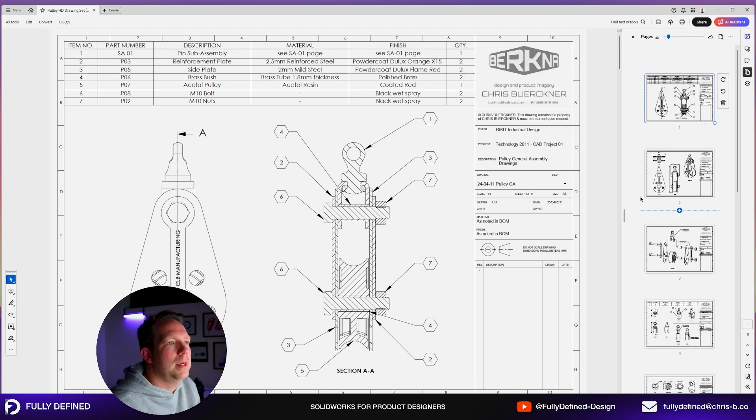What we're going to create is this drawing set. Now, this is the last version of the drawing set that I created for my students. This one was done back in 2011, so it's had a decent life. Berkna in the top right-hand corner, that's my old freelancing logo. That is my name and my Hotmail address. But the drawings here, we're going to just create a replica of these. It's 11 pages of content, and if we press the pages icon here in PDF, we can flick through them all and you can see quickly what those are.

The general layout that we'll be working to is having a general assembly on the front page with a bill of materials on the top and some general views. We will have standard 3 views and an isometric view on page 2 of the assembly showing overall dimensions. We will have an exploded view showing how our parts come together with a couple of annotations and route lines.

We will have a drawing for the sub-assembly, again showing some of its dimensions. We will look at configurations to do the before and after of the pivot pin, and again, do a second bill of materials for that sub-assembly. And then we go into detail for each of these parts.

Now, these part drawings, we're focusing on a couple of drawing views, dimensions, view labels, in some cases some annotations, and sectional detail views. We are not focusing on the materials, the production methods. That's another level of technical drawing and design knowledge that we're not getting into in this project. This project is for beginners doing drawings for the first time. So I'm going to introduce you to all the tools that you need to replicate what you can see here on screen.

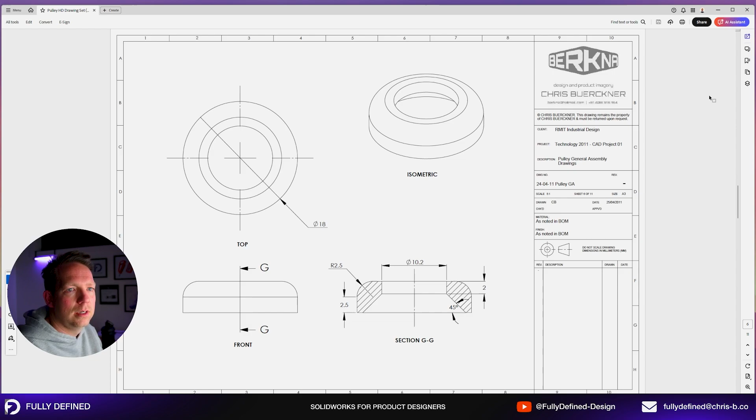Now, some of those parts, as we know through the modeling, are quite simple, so they're obviously going to be simpler to create on a 2D drawing. And then others have intricate details like the engraved text on this. That's going to require a detail view. Again, we'll show you how to do those.

Sheet metal part. Can't remember if we've already converted our form bracket into sheet metal or not, but we will go through that process. And the pulley wheel will show you how to do a section view, detail view, and a couple of annotations. And that's going to be our complete drawing set. So let's get straight into it.

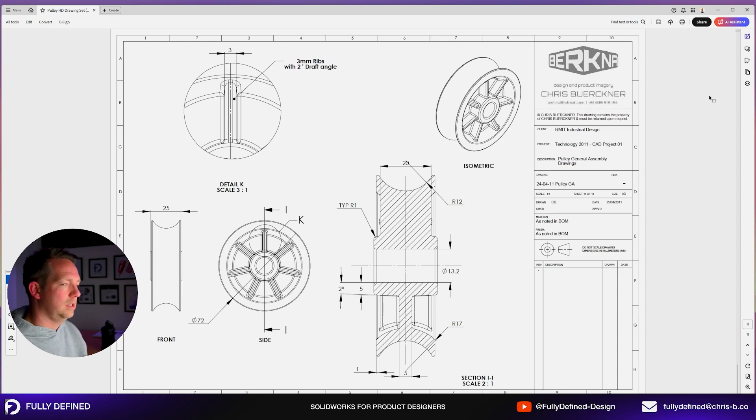This file is also available in the Google Drive for reference. So you can come to that, download your own copy at any point. You will be welcome to lay out your drawings following this guide here. I'll talk more about that as we go.

Now, to start a drawing file, it is helpful to have the parts or assemblies open that you want to create a drawing of. Saying that, you don't need to open up all the individual parts. Just start with your assembly open, because that's going to be the first drawing that we might do anyway. You can go File, New, or you can go Make Drawing from Assembly. Let's press that button and see what happens.

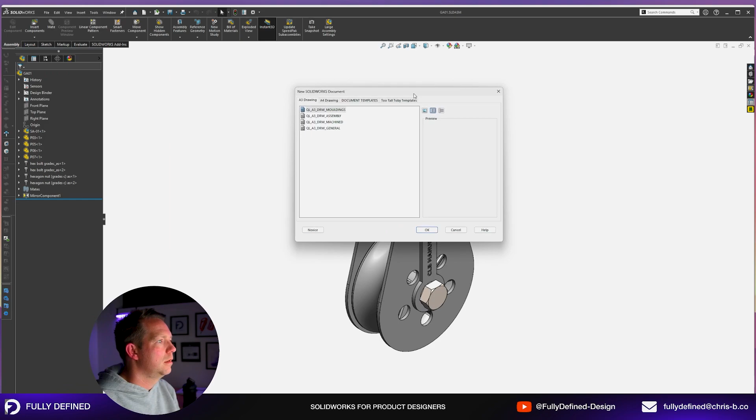All right, so that will take us to our new SolidWorks document screen. Now, if I flick over to the novice screen here, you can see that parts and assemblies are grayed out. It's only going to allow me to select a drawing file. So I can select drawing and OK. And then our very next screen is going to open this sheet format size pop-up window. Now, this may not happen depending on your SolidWorks defaults.

So here I'm going to explain a little bit about SolidWorks file types, SolidWorks document templates, and sheet formats. We already know there are two types of SolidWorks files. We have a part file and we have an assembly file. The third type of SolidWorks file is a drawing file. A drawing file, as you can see from the description, is a 2D engineering drawing, typically of a part or assembly.

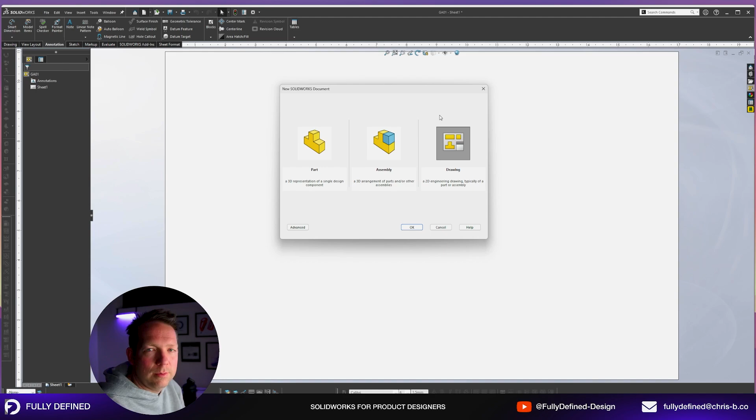You can do drawings and sketch something completely new in the drawing, but it's only ever going to stay in 2D. And that's a pretty rare case. It's very rare that you'll do that. 99% of the time, you'll be referencing the parts or assemblies that you've already created. Now, those being the three file types, when you have a drawing file type, as you can see here on screen, our tools are very different. We have different drawing views, we have view layout tools, we have annotation tools, we have sketch tools.

Sketch tools are just like in a part file. There are some differences in how they function, but they're there. We also have markup, evaluate, and some other add-ins. Now, I'm going to turn off a couple of those ones because we don't need them. Don't need add-ins. I do not need evaluate. I do not need markup. I'm going to turn them off.

And sheet format, we have some buttons here to edit sheet format, edit the title block, or create an automatic border. Now, what is a sheet format? Let me explain with my drawings here. If we look at this page and we want to understand what elements are custom for the page, if we look at our drawing views here and here, everything there, that's driven from those assembly files.

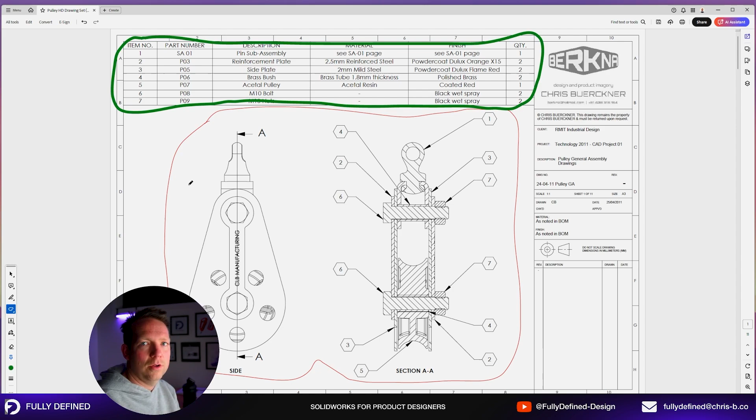Let's draw some bigger lines. We have a bill of materials up the top. The bill of materials is a table that gets inserted into our drawing, and that table is referencing the model that is on that page. In this case, it's referencing the assembly file. We have a similar thing on this page here, where this bill of materials is referencing this sub-assembly that's on the page.

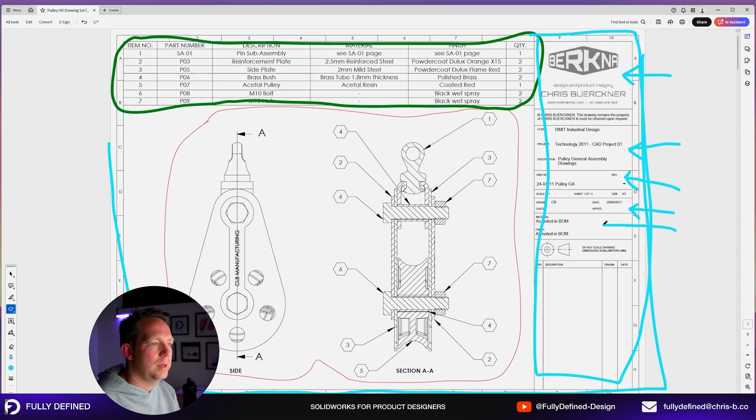And then the other element that we have in our drawing, which we can see, is the border that goes all around the page, and then our side over here where we've got some company information, some information about the client and the project, drawing number, revision, scale, sheet size, etc., some information about materials, third angle projection symbol, and then a revision table. All of this, everything that's in the light blue color, that is your sheet format.

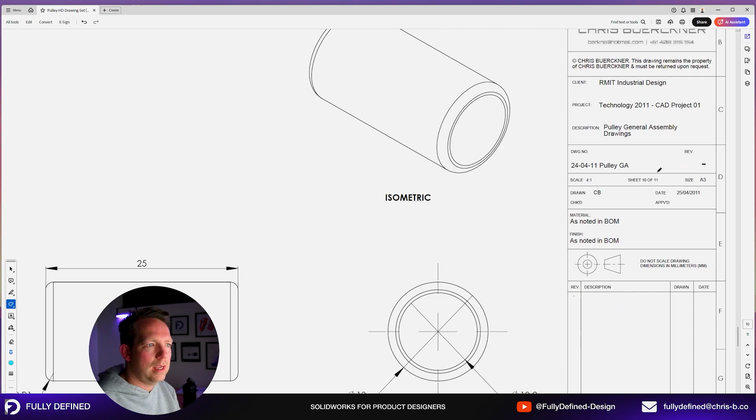And if we go through these pages, you can see that sheet format is consistent throughout that entire file. There's a couple of elements that do change from sheet to sheet. In this case, our sheet number and our scale. So if I flick through the pages, you can see it just below here, so scale and sheet.

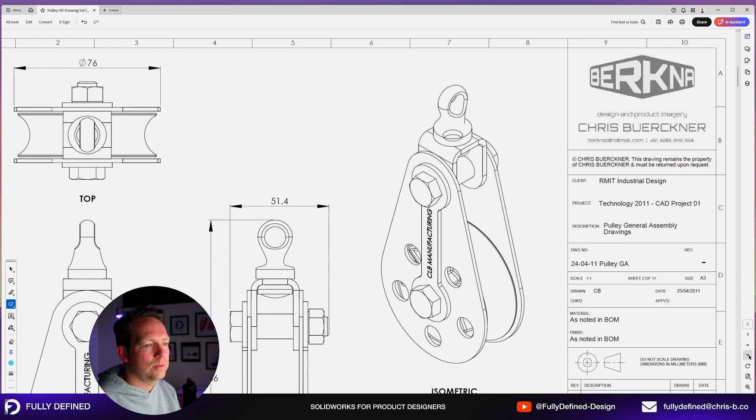So the sheet is like page, so it's page 8 of 11. And the scale changes depending on the images, the drawings, or the files that are on that page. So for my assemblies, they're 1:1 scale. But when I look at some of these smaller parts like the washer, if I were to do this part 1:1 scale, it would be tiny on my page. It would look really out of place.

Now, typically what you might do is instead of using an A3 drawing size, you might use an A4 drawing for that part if it's so small, and have it at 1:1 scale or 2:1 or something like that. But let's remember that our objective with these drawings is to communicate. Okay, so when we're saying communicate, we want to be really clear about the information that we're providing to whoever it is, work out who our audience is, work out what they need to see.

If it is a manufacturer, they're producing this part, well, they want to know to what dimensions and to what shapes and forms they need to make that part, right? Without going into detail about manufacturing processes, that's what they want to see. So the light blue being the sheet format, if we go back into our SolidWorks file here, we can see there's actually nothing on this page. And this is what could be referred to as a blank or empty sheet format.

There's nothing here. So if I close that file and start a new drawing again, it's at this screen here where you can select a sheet format. If you don't select a sheet format by clicking in standard sheet size and then browsing to one or selecting one already, and you select custom sheet size, that is how you can actually create a blank page in a SolidWorks drawing. So if you just want to create a blank page that, let's say, is an A4 size, so 297 width by 210 height, this is in millimeters, you press OK. We now have a blank A4 page.

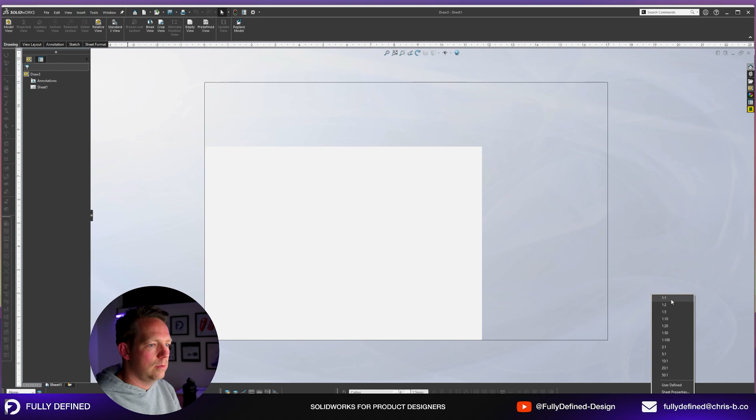And if my scale is 1:1 and I do, let's say, a sketch of a rectangle and I put in my dimensions, sorry, this is in IPS, let me change to millimeters. You'll see here, 210 by 297. Okay, that is an A4 sized drawing. So that's a handy tip if you ever need to create a blank page.

Now, when might you want a blank page? Let's say you're doing some concept work and you actually don't want a sheet format on your pages. You just want to print out something that you've been modeling quickly. Okay, maybe you want to create a 1:1 model or have a sketch there in front of you. Have a dimension drawing there in front of you so you can do some sketches over the top. You don't want the sheet format stuff around it. This is what you want to do, a blank page. So now you know how to do that.

But for our project here, we actually want to have that detail on the page. So all this information here, we want it in our file, in our drawing file, so that it carries across to each page so that we know and our supplier knows the information that we're communicating to them. In this case, we're going to communicate to them the name of the project, who our client is, the description of the drawings they've received, the drawing number, and other things such as the date and revision.

Okay, this is important. If you don't know what a revision is, well, a revision is the version of the part that you're sending them. So if you've sent one part previously, you've made some changes after some feedback or prototypes, you want to send them version 2. Okay, you want to make that clear on the drawings so that that supplier doesn't get confused with an old and a new revision.

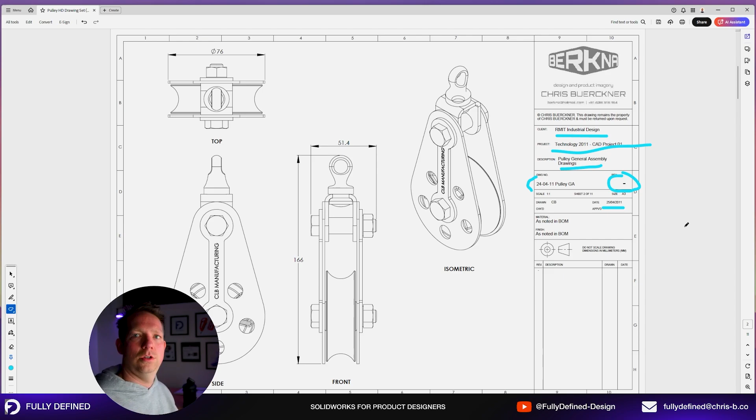So, sheet formats, let's go into how they work and how we can create our own. We won't create our own in this project, I'm going to give you one, but let's see how they work with our files. So, to get into the sheet format mode, let's open a different file that has a sheet format. Now, I have created one already. I'm actually going to import it into this drawing by clicking on standard sheet size, browse, and then I'm going to browse to the one that I've created. All right, so this is our sheet format. Looks a bit different to the one that you saw earlier, but it's going to work in a very similar way.

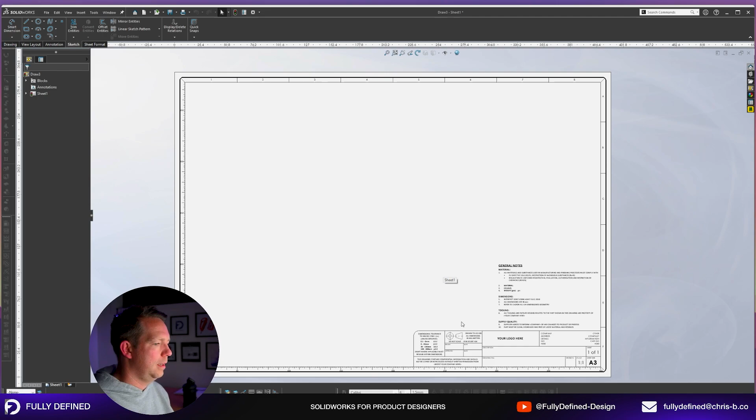You'll notice that these lines on the page cannot be selected. That is because it is part of the sheet format. If I want to edit the sheet format, I have to click on the sheet format tab and click edit sheet format, or right click on the screen and go edit sheet format.

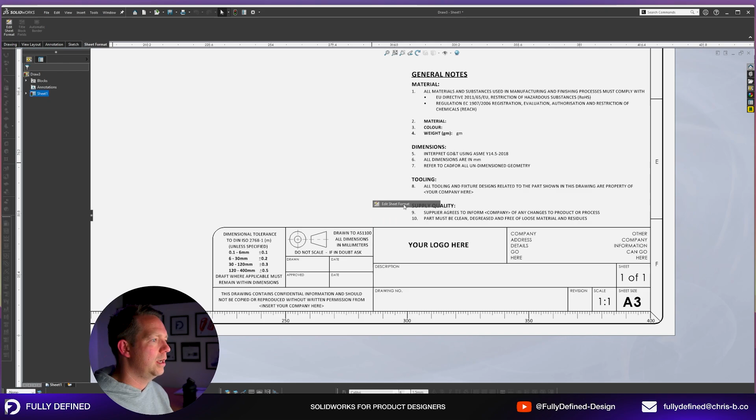Now I'll be able to edit these lines. So I could select this line, for instance. I can see it's just a standard sketch line. It's on a layer, which is thick, so it's thickened up that line. You can look at layers and layer properties another time.

But these are all these little elements here, just different sketch elements on the page. And then here, these are annotations or notes. In this example, this note is just the number 2, but that is something we could change if we wanted to.

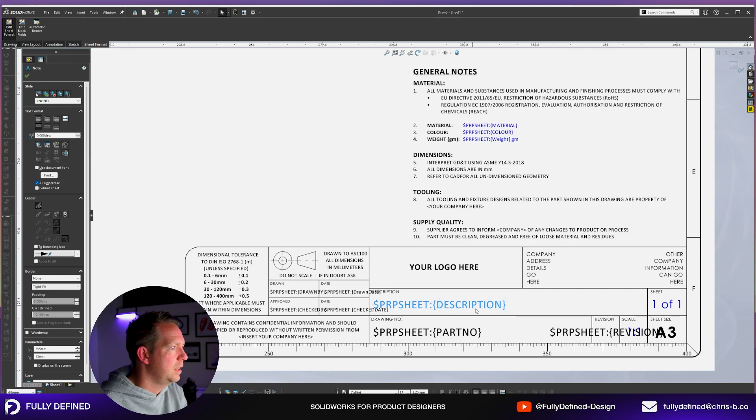Down here is our main information, and you can see there's a couple of items which are actually changed to color. Just to make it really clear, I'm going to change the color of some of the others so that we can also identify them.

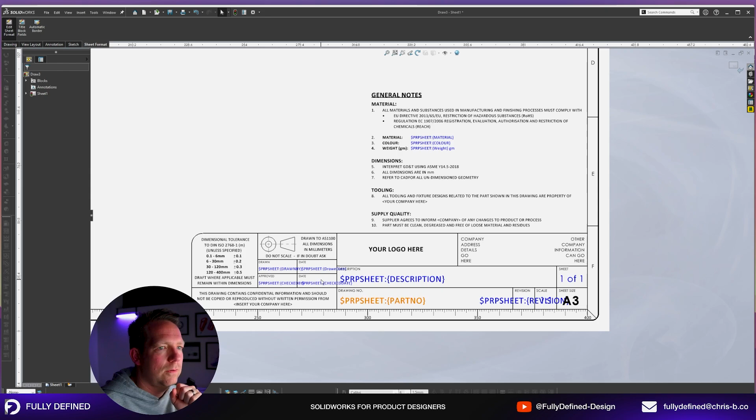Now I believe I've got everything here in blue, which needs to be. So all the blue elements, you can see they've essentially got a formula.

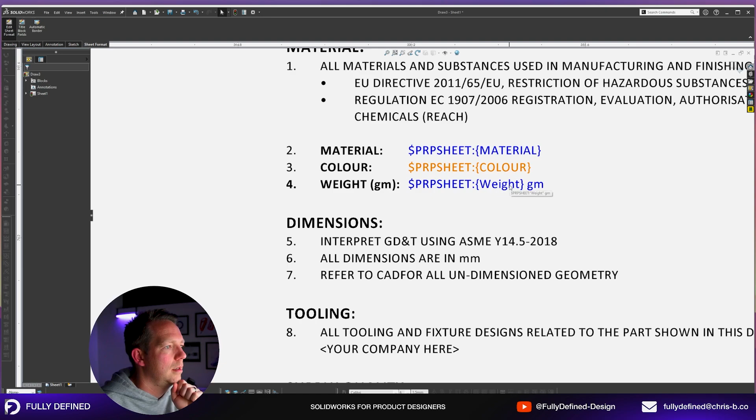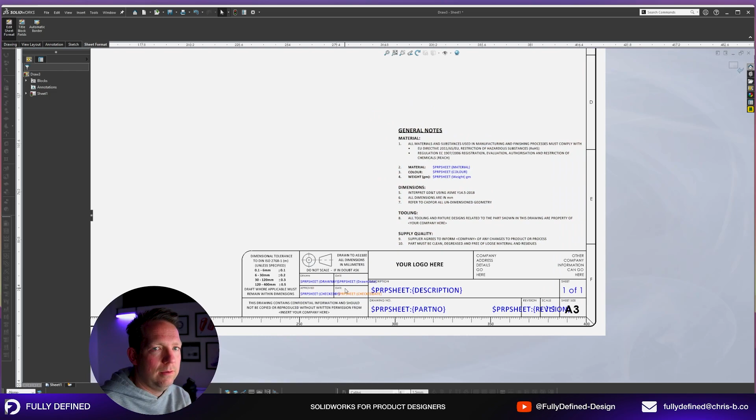So if we go here, $PRP sheet material, color, weight - what those elements are looking for is a value to come from a part or assembly file that is put into this drawing. When we're editing the sheet format, we can actually change those equations, those formulas, to reference something else. That is something I will show you in one of the later lessons of this project, or more advanced, I might show it in a more advanced class for drawing setup.

But the main thing I just want to get across is that everything that is black is static. It won't change, it won't move. So when we create multiple copies of this page in this drawing file, we will end up with all of that black information being exactly the same.

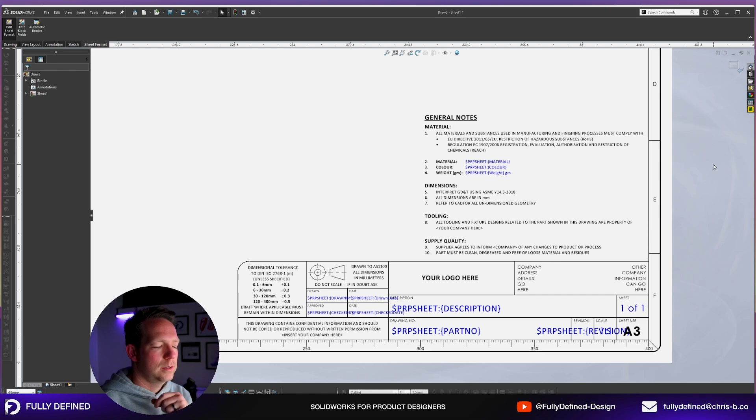It's only the blue elements that will change. And those blue elements will only change if, for instance, we have a different part on a different page. Well, that part number is going to change. Okay, so that is our sheet format mode.

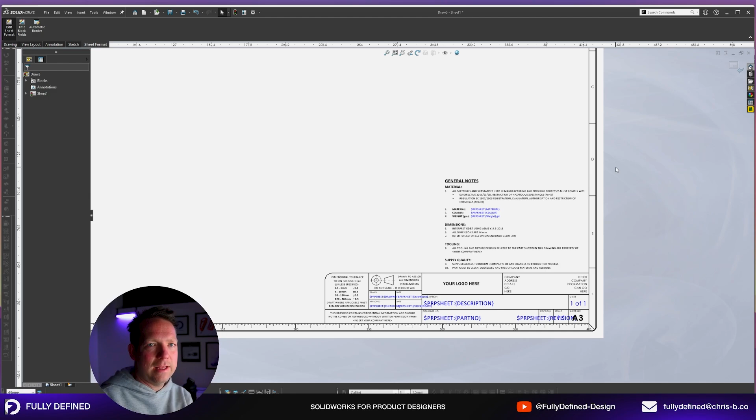Now to exit out of that sheet format mode, we're going to click this button here or here. We're going to right click and go edit sheet. And then we're back into our normal view mode, being where we're going to add our drawings of our parts.

So while we're at it, talking about sheet formats, I also want to talk to you about document templates. This can get confusing as a beginner because templates and formats sound like kind of the same thing.

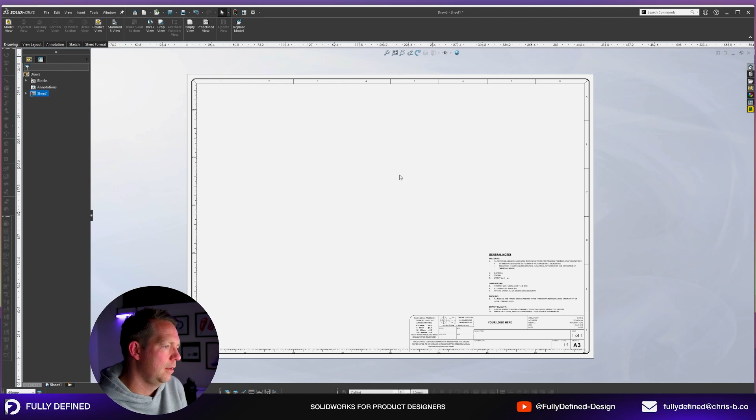Well, not quite. I want to explain by opening up this screen here where we have a new SolidWorks document. So when you select this part here, it's going to open up a new part file, and that new part file comes from a part document template or a part template file.

So with any SolidWorks installation comes default templates. And if you are using SolidWorks for the first time, no one else has used it on your computer, SolidWorks will just use the default templates.

If you're working for a company that has an established engineering team, design team, other designers, they may have already created these templates and stored them on a server or on the cloud, or on the laptop or computer you're working on.

And those templates save such information such as custom properties. Sometimes it'll save information like the author and company details. And often it's a way for a company to keep track of their files that they create internally.

Now there are part templates, there are assembly templates, and there are drawing file templates. The template is different to a sheet format. The way it is different is that when you open a template file, so drawing template, it will include a sheet format already assigned to it. You can have multiple sheet formats with multiple document templates.

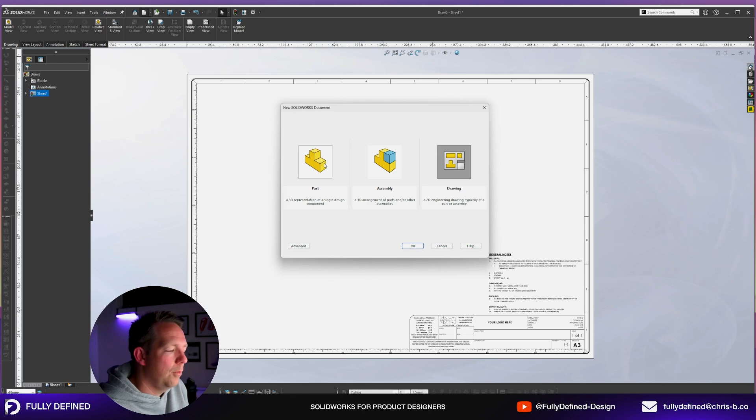And where that comes into play is when you click on this Advanced tab on the new document screen, you can see here there are folders. These are tabs, but these tabs actually correlate to folders that I have in Windows Explorer. And within those folders, my folder of A3 drawings, I have 4 different drawing templates.

So let me just zoom into that to make it a bit clearer for you. I have an A3 drawing folder, A4 drawing folder, and a document templates folder, TooTallToby templates. See TooTallToby stuff on my page or his website for more SolidWorks and 3D modeling tutorials.

Within A3 drawings, I have A3 drawings for moldings, for assembly files, for machined parts, and for general assembly parts or general parts. So I have 4 different templates, and each has a slightly different sheet format. Same in the A4 drawings. Included here as well is a blank template.

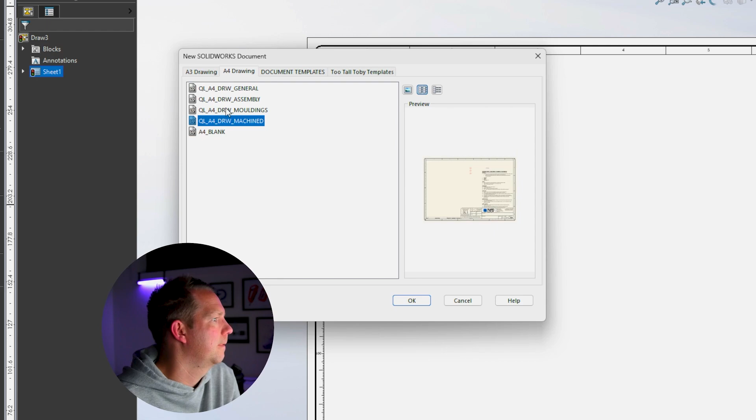Okay, now one of these might be off. I might have to go in and edit that one, fix that up later. Document template files.

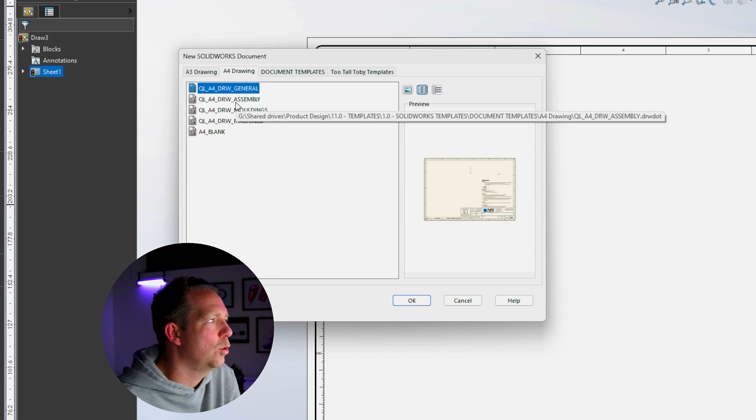I have a parts template and an assembly template. This is from my workplace, so Quad Lock. Anyone starting a new part file is going to use the same part template. Same thing for assemblies. But drawings, well, that'll depend on what you've created and what its purpose is.

Okay, so if I look at an A4 drawing here, a general template, and press OK, that's going to open up with this sheet format that you can see on the screen here. And if I right click, go edit sheet format, you can see how this looks.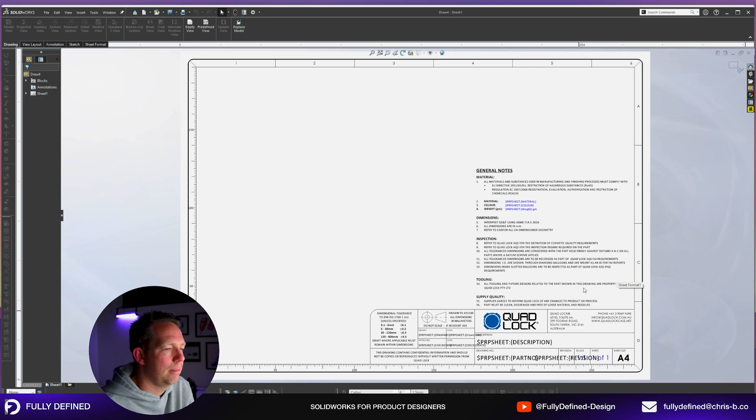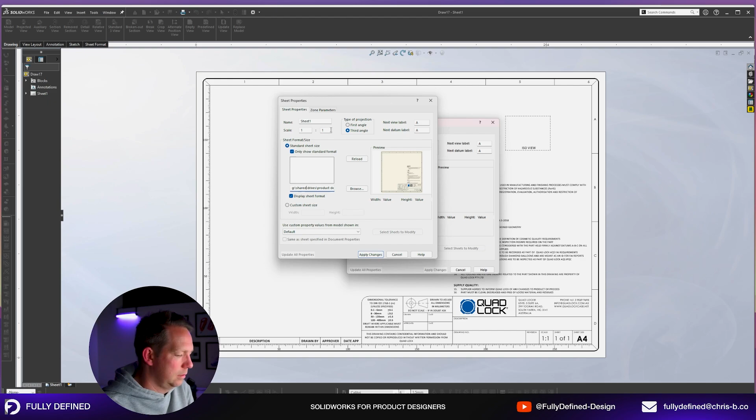Okay, so what happens with the sheet formats? If I start a new drawing and I'm starting a general drawing, A4 file, that is a drawing template file that I've opened up. Within that template file is this sheet format. The sheet format can be found by going right click properties, and the sheet format being used is this file here. So this is the address of that sheet format.

And what's so great about that sheet format is when I want to create multiple pages or multiple sheets in this one drawing file, I can press add sheet, and it's going to create a new sheet with exactly the same sheet format. So that'll carry on across all pages that I add into this file. I don't need to manually add that sheet format to every single page. Just do it once and it's there.

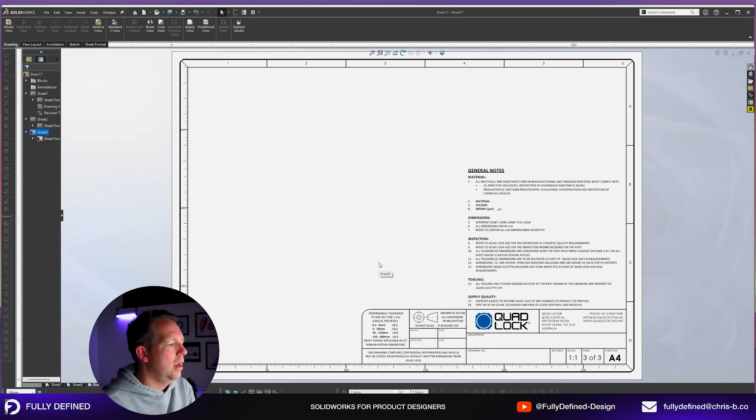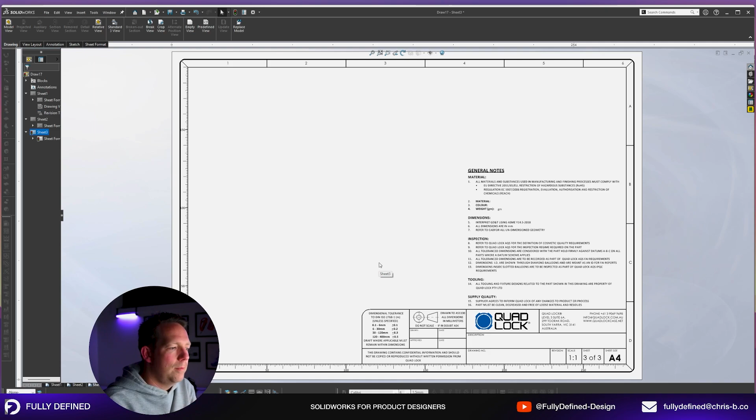So one of the important things with your sheet formats is that you want them set up before you create your drawing set. Okay, if I create a drawing document and I've got, let's say, 10 or 11 pages like we're doing with this Pulley file, if halfway through the project I decide I want to make some updates to my drawing template, to my sheet format, I have to go edit the sheet format, save the sheet format, and then go individually to each of these pages and press the reload button. And that's not something you want to do.

So I definitely recommend always creating your sheet format, editing it, saving it, setting it up as a document template first before going ahead and creating your drawing files.

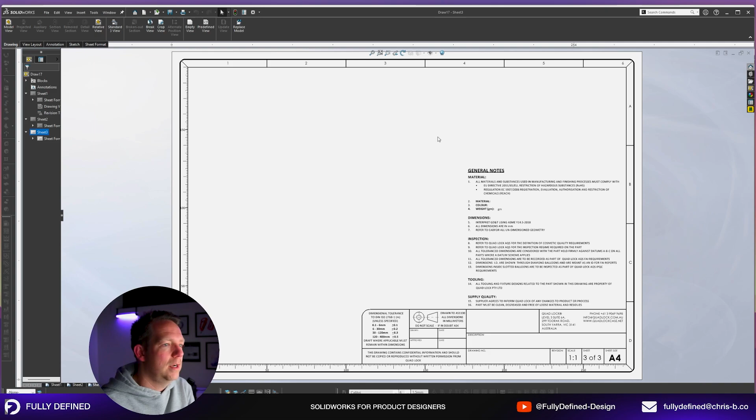So it's at this point that it would be good for you to go into the link below to the Google Drive and download the sheet format file that I've created here. Because I'm not expecting you to create your own for this project, but I want to show you how to import it, download, import, set it up in your own file to then be able to use it across your drawing set. So what you need to do is click on the link.

We'll just use an incognito window here. We're going to copy the address that I've given you, and it is this Pulley A3 drawing general.slddrt file. That is a sheet format file. You want to download that. I'm going to save that in my downloads.

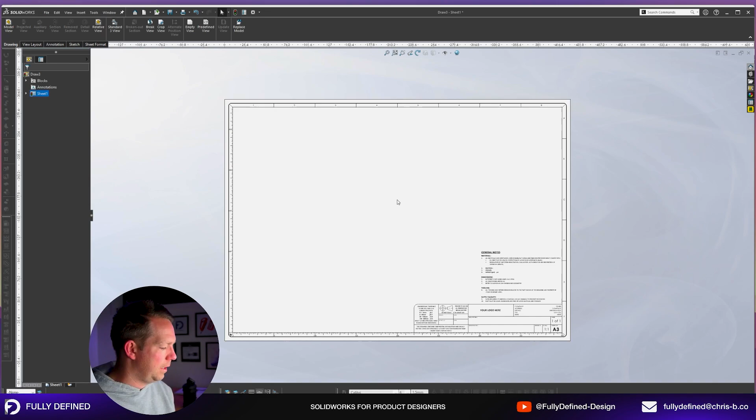Okay, and then to open it up, let's just close this file, and we're going to start a new drawing. Now you can select, even if you're a novice here, you can select drawing and press OK. And when you get to this point here, we're going to click standard sheet size, browse, and then you can browse that file that you downloaded.

Now, ideally, you will have put that file, let's say, in your folder with everything else. In fact, why don't we do that right now? I'm going to cut and paste that into my project folder for my Pulley, so it's going in here. Once it's there, I'm going to select it, press open, and press OK. And you can see now it is in our drawing file.

Now, just in case you did want to make changes before you go through the drawing set, we're not going to look at any detailed changes, but something like your logo.

Right, you can edit the sheet format. We know how to do that now. Right click, edit sheet format. You can type in your details.

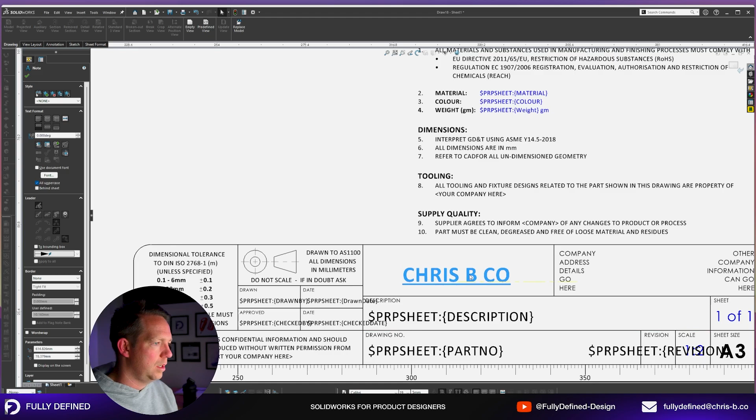Just double click and type, or let's get this into millimeters. Let's say I want that to be 5 millimeters, and I'm just going to put it here. It's already bold, let's get it underlined as well. Okay, so let's just say that's my logo.

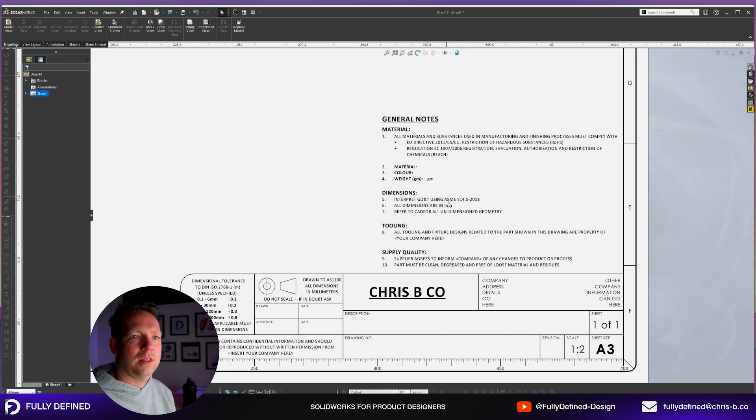Perhaps you want to change your company information, you could do that as well. Perhaps you want to change any of the notes here or scrap them entirely. You can go to edit sheet format, select this whole thing, and press delete.

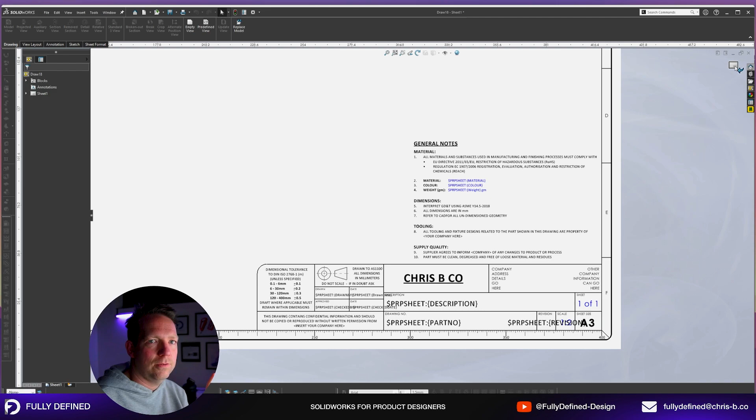You could do that if you want to get rid of them. But to save those, there are two things you need to do. First, you need to exit the edit sheet format, so we get out of that. Second, we go File, Save Sheet Format, and then you need to give it a name. So here I'm going to name it edited so we know there's a difference.

Now the edited one has the bigger logo, so just watch that carefully. If I click add new sheet, it's going to add a sheet with the old sheet format.

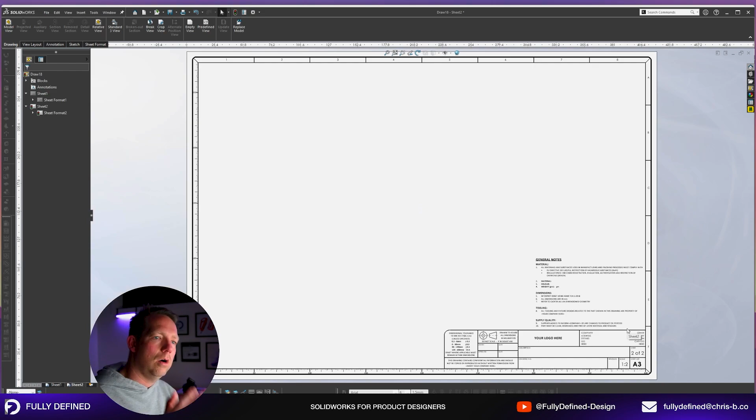If you want to keep that sheet format from page 1 consistent across the rest of your pages, you need to right click on sheet, go to properties, click here for browse, and we need to browse to that new file you just saved. So going to go into here, and it was the edited one. I'm going to press open and press apply changes.

Now we won't notice any difference on this page, but something has been deleted there. What we will see is on any subsequent sheets, that logo carries across now. So sheet 1, 2, 3, they are all the same, except for some reason that little icon wasn't showing up. It's there now, okay? All right, so that is how you can edit and save a sheet format.

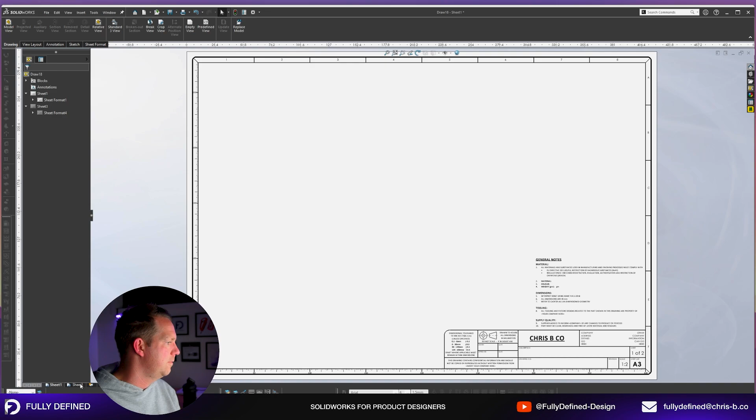Now, one of the really fancy things, I'm going to go back to the original drawing. Okay, browse, content, Pulley. All right, let's stick with this drawing file now and let's save it with the rest of our Pulley files. Pulley drawing set.

Now, the name of the file, I'd like to say it's important for this project. Not important, but when you're doing work with a client, the name of the file usually ends up in the description, or the title of the file, depending on how your links are set up. You will see it at the top of the screen here where it says drawing 19. That is where the name will stand.

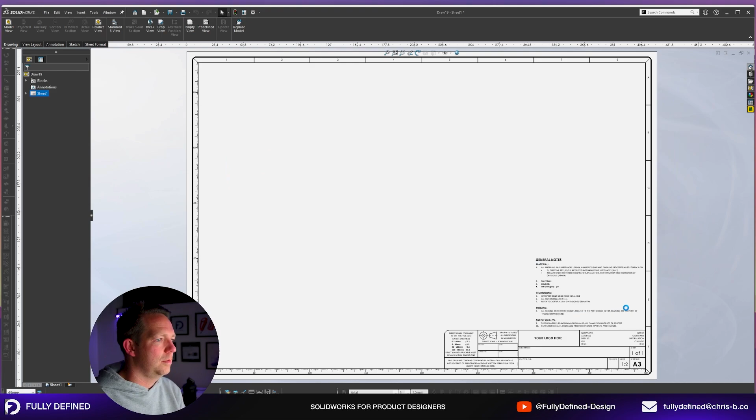And then when you print your file, so if you save as a PDF for instance, by default it will use the name that you set here. So you can change that, of course, but if you know what you want to call your drawings from the start, it does make sense to put that in when you save your file.

Now that we've covered off the basics of sheet formats and document templates, I know it's a bit dry, but we've got that out of the way, we can now move on to starting to bring in some of our drawing views into our file. We're going to start with the general assembly, work on the exploded views, some basics, and then we'll do the individual parts as we go. It will actually get a bit easier as we progress through.

Our first page, if we remember, I will have to get rid of the drawings somehow. On our first page here we've just got a front or section view and a side view, but what we're actually going to do is this one here, where we've got standard 3 views and an isometric view.

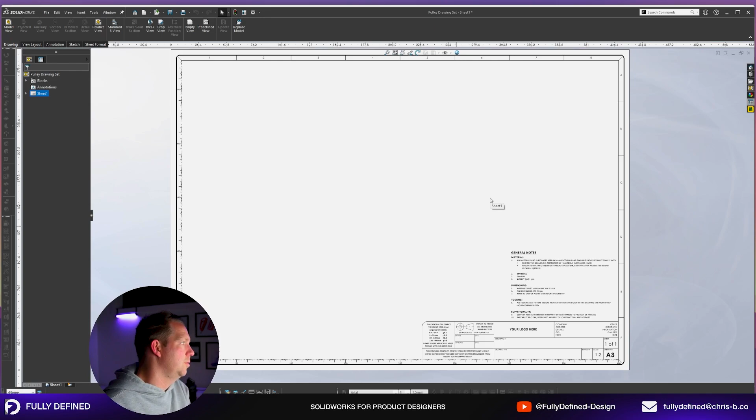So in SolidWorks, this is what we do. Assuming you already have your assembly open, now to see if it's open I can Alt Tab between my files. I'm going to click on View Layout, Standard 3 View, and then we can see Open Documents. Now, if you don't have your assembly open, it won't show here.

You can browse to that file, find your General Assembly, and then press Open. We're going to click on the General Assembly, and then I'm going to press the tick. Let's see what happens. Okay, we get standard 3 views into our file. Now, these 3 standard views have come in at what's called a three angle orthogonal.

I have to look it up. Third angle. These standard 3 views have come in at third angle projection. Now, how do we know? Well, third angle and first angle are 2 different drawing types. You can see the difference between them in architecture and, let's say, product design drawings. Typically, I think architecture is first angle projection, whereas SolidWorks product design drawings are third angle projection.

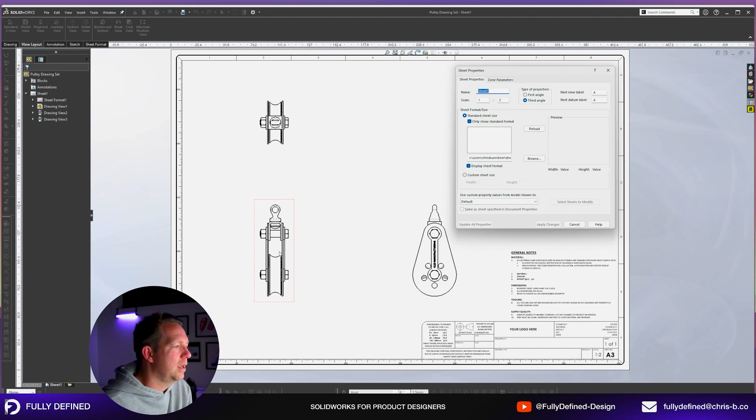We can see here third angle projection. What that means is we get a front view, a top view, and then a side view to the right. And those are our standard 3 views. Now these standard 3 views are special compared to some other drawing types. You can create it manually, but what you'll find is the front view, which is the one in the bottom left, if you click on the box surrounding it and then you drag, you can see it is linked to the other 2 views. So the top view and the side view will follow this one around.

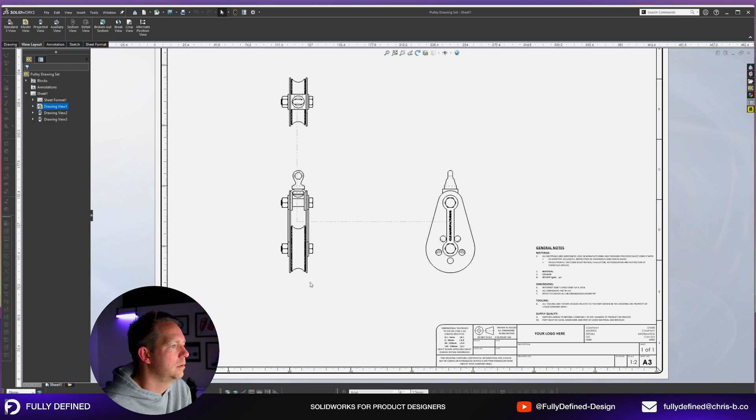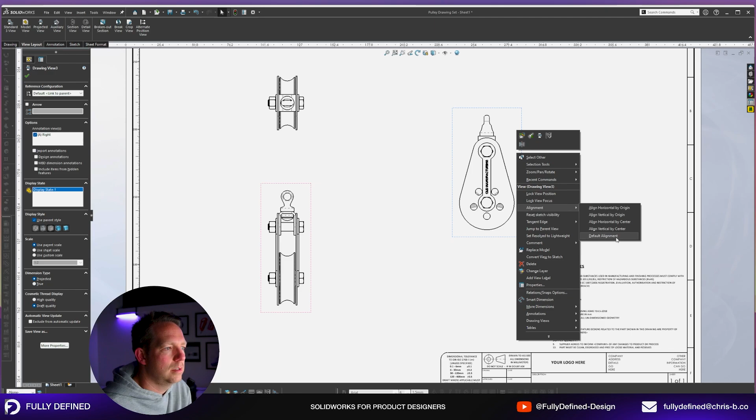You can unlink them. You can see this side view here, I cannot move it up or down. I can only move it side to side. But if I want to move it anywhere on the page, I can right click and go alignment, break alignment. Then I can drag it around. If I want to realign it, I can go right click, alignment, default alignment, and it will once again put it back in line with the original view.

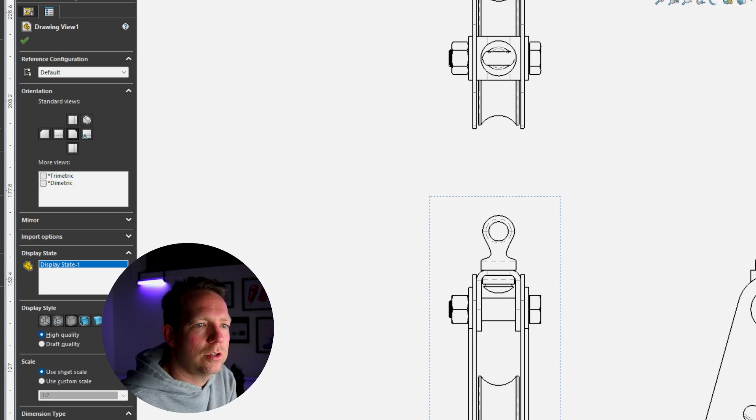Right, so there's a couple of other cool things that come with using the standard 3 views. So firstly, they share what's called an appearance type or display style. We're just going to zoom into the feature tree here. Just move my head out of the way, and let's get these 3 drawings over to the side. So your display style is here. You can see that there's 5 display style types. Now these types, we've seen them before.

So if you remember in our part or assembly files, at the top of the screen, you can see this drop down. Shaded with edges, shaded, hidden lines removed, hidden lines visible, or wireframe. Different display style types. The same can be done with your drawings. So if we click on our front view of our drawing, we can change the display style to shaded. And that's going to change it for all the views connected from the first view of this linked 3-view drawing. Now you can change them individually, much like you can change the alignment.

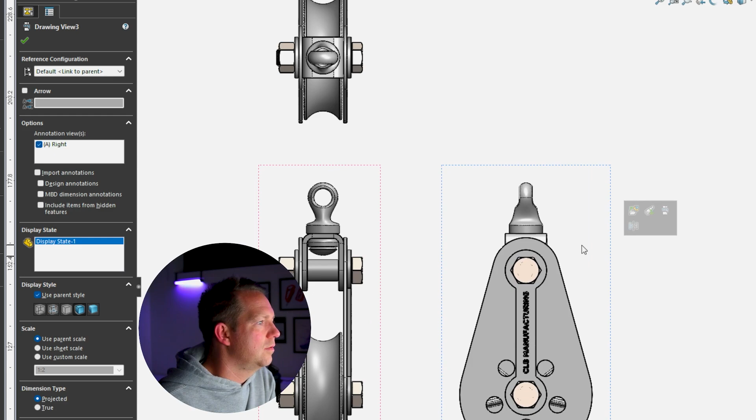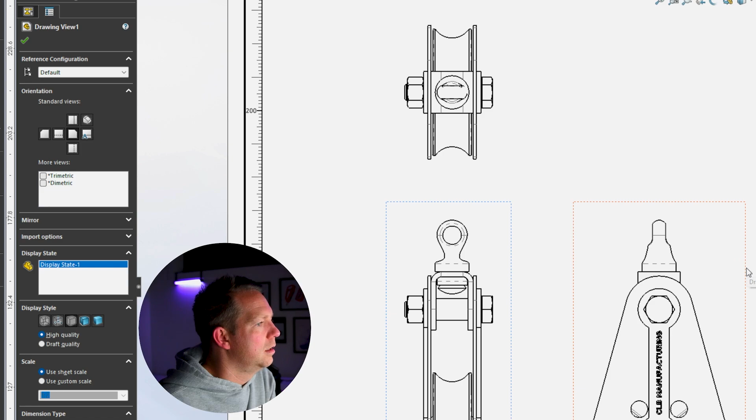If you click on one of these projected views, you can then uncheck use parent style, or just simply select a different view type. Okay, that will change the view style of those parts. The standard 3 views also can share scale. They can share other options, and what you actually see in the side view and the top view is related to this very first view.

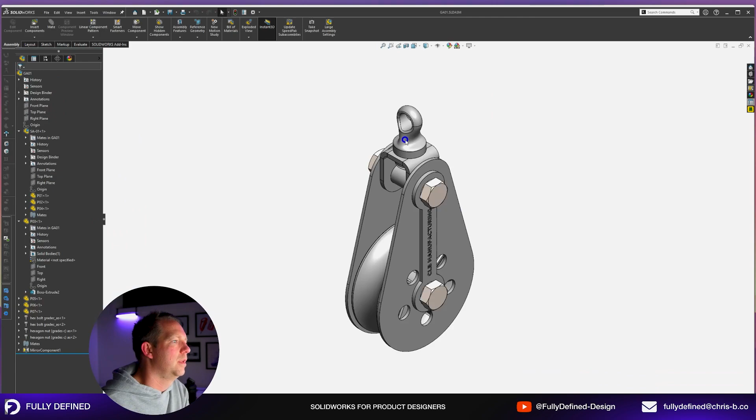So the first view that we brought in using that tool, standard 3 view, will by default be the front view in your assembly. So if we Control Tab back to our assembly file, press the space bar, press front view, this is the front view that we will see in the drawings. Sometimes though, like we can see in our drawing here, we've actually repositioned it on the page, maybe slightly outside standards, but to fit it better on the page at a 1-to-2 scale, we want that top view going horizontally across rather than straight up and down. So we've made our first view the side view.

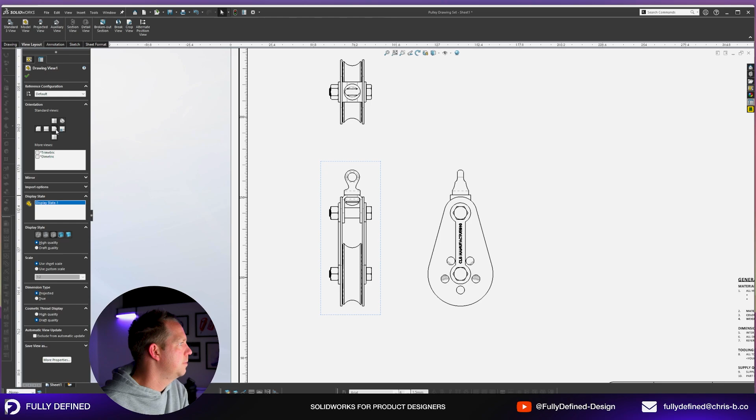To do that, we're going to click on that front view and go into the orientation bar and just click on some of the other views to see what we can get. So if I click on the left, I get this view here where I can see the nuts and the bolts. Or if I change it to the other side, I just get the bolts. Where this is also very useful is when we do, let's say, an isometric or 3D projected view that's connected to these shots.

So this time I'm going to select projected view on the toolbar. I'm going to scroll down and you can see when I move my cursor over these views, I get a little preview box or bounding box that comes up. So you don't actually have to click on a part to do a projected view or anything like this.

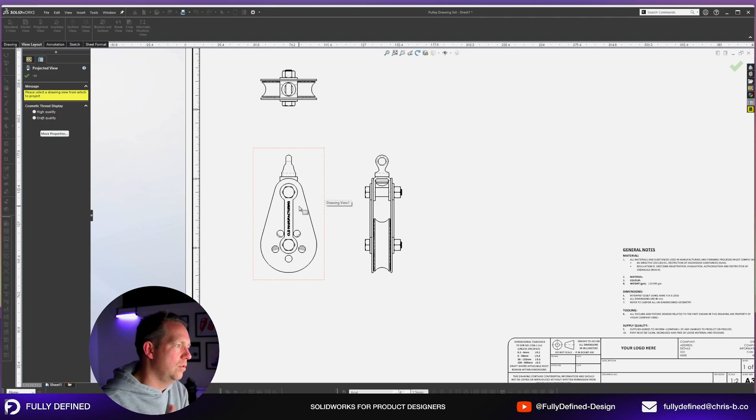You just click on the view, the bounding box. I'm going to click on the side view, and then I'm going to drag my cursor. So I've just clicked, let go, and I'm going to drag my cursor, and you can get a preview of what that looks like. So this is projected view. As I move my cursor around, I will get different previews of what the drawing will look like at those angles.

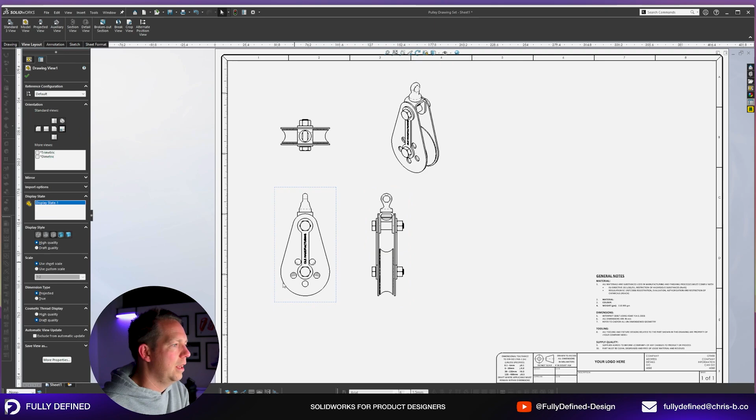Now in this one, I'm going to do an isometric view, so I'm going to click and drag over on that side. And now again, if I go back to the original view, the front view, and I change the angle, you can see it's going to change all 4 views now, not just the 3. And the same thing will happen with my display styles if I'm using a parent display style for all 3. Okay, cool, hey?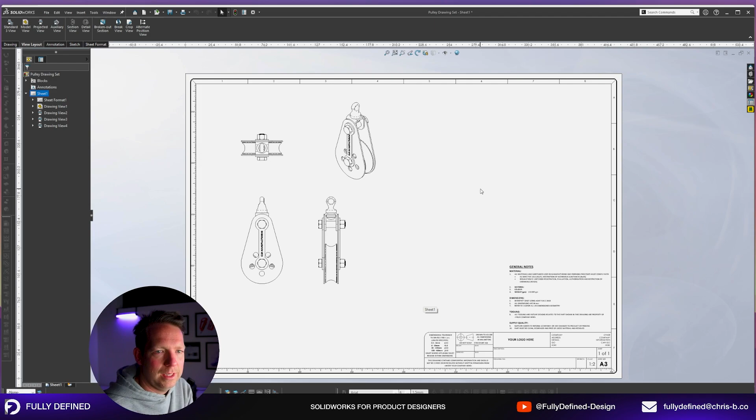So what I'd like you to do is replicate this page. So to do that, first, work out where we need some space; we're going to have to change the scale of the sheet. So the scale, you can see it in a few places. At the very bottom of my screen, I'm just going to lift this up so you can see it. We can see here it says 1:2. If I click on that little drop down, I can click Sheet Properties, or I can click here and change the scale very quickly. So if I click 1:1, that changes the sheet scale to 1:1.

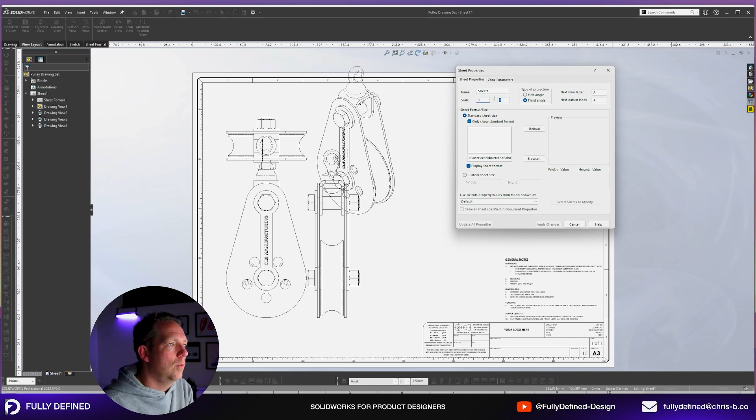Sometimes that doesn't work. It's weird, I know. But if it doesn't work, click on Sheet Properties, and then you can manually type in the scale here. And this is where you can also put in scales that aren't standard. Not advisable, but sometimes you need to do that for communication purposes. 1:1 in this case, and we can see how it's changed all those drawing views.

Now those drawing views, their scale can also be controlled in the property manager on the left, where I can use a custom scale that's independent of the sheet. So the sheet is 1:1, but I'm using a custom scale for this drawing view. Again, not advisable. Best practice, use a consistent scale throughout all your drawings. Next best, use a reasonable scale like 1:1, 1:2, 2:1, etc. in as many drawings as you can.

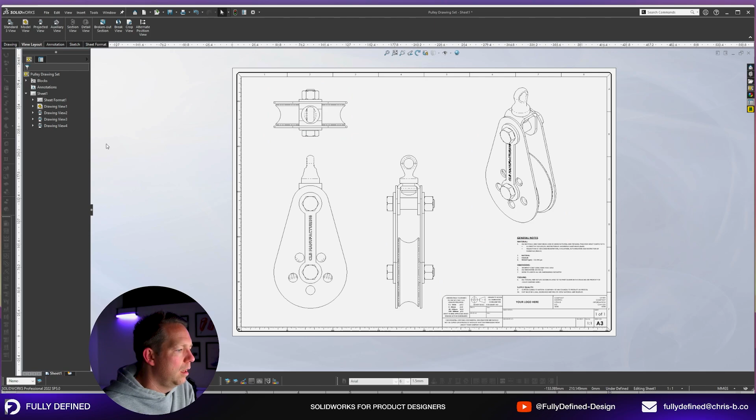Now this product, fortunately for us, is made at a size which works pretty well on a standard A3 page. And wouldn't you know it, when the students have to print this project and submit them on actual paper or PDFs, they can use standard page sizes and standard paper. So there was some reasoning behind that. I want you to replicate what you can see in this with the layout. Now our sheet format's slightly different, but that layout should still be able to work. Make sure you are saving.

All right, so that should be a pretty quick process just to get those 4 drawing views done. That's all you're doing for now. We're going to go through the drawing set in stages. So what we're going to do is try and lay out all the drawing views first across all the pages. Then we'll do the detail views and section views. And then at the end, we'll do all the dimensions and annotations. That way, we're not jumping around too much. We're actually learning step by step how to lay things out, set things up in the right way to use those skills efficiently as we go through.

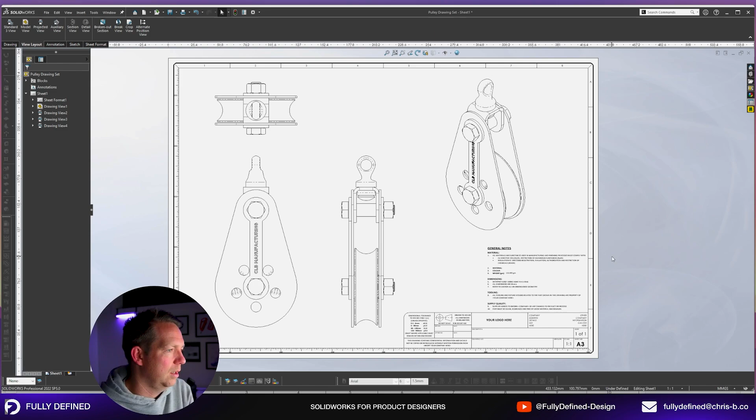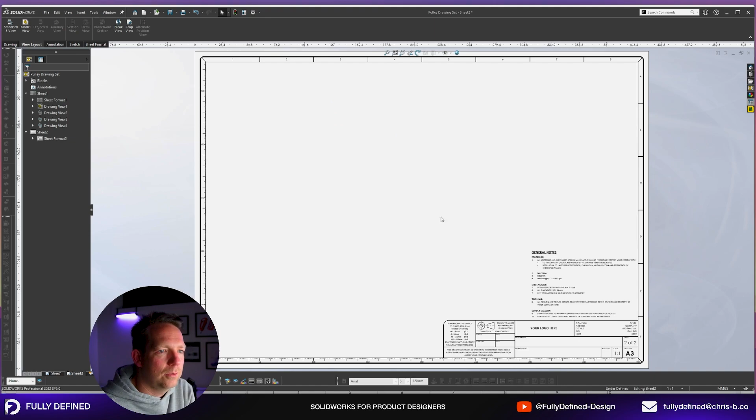So once you've done this page, I want you to create a new drawing. So we're not doing a new file, we're just adding another sheet. So you go down to this icon here in the bottom left, click Add Sheet. If you do get this warning about blocks with duplicate names on other sheets, normally you can just say yes or no. It does not matter. Okay. Unfortunately, there's no option to dismiss that warning by default. On this page, I want you to create just a side view. And then I'm going to show you how to do a section view. And that's going to be the end of our first lesson, I think.

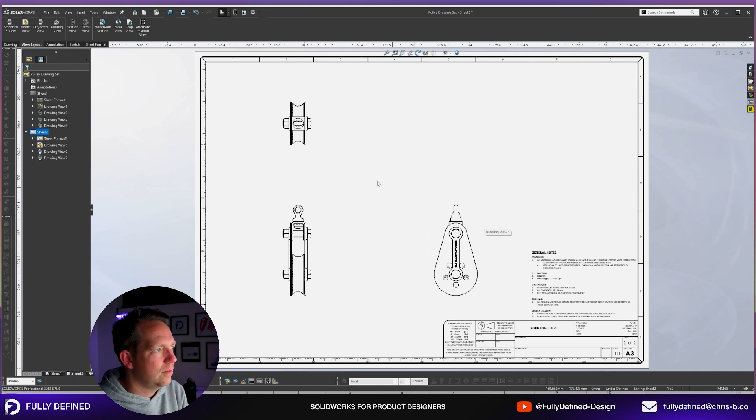Now, we don't need a standard 3 view on this page, although you can use it and then delete these other views. That is one way to do it. What we actually want is just one view. Now, if you ever just want to put one view in a drawing, the best way to do it is to use model view. So I'm going to click model view. I'm going to click GA01.

I'm going to double click it, and then I can actually get a little preview of the size of that drawing view. Now I can see that that's kind of the front on view. Okay, I want the side view. So in my property manager, I'm going to click to the side. I'm going to scroll down, sheet scale selected, that's okay.

By default, it's put my sheet at 1 to 2. That's fine, I'll drop the view and then I'll change the sheet scale. So there's the drawing view, and then I click on sheet scale 1 to 1, and I'm just going to leave this one down here. And now for the section view tool.

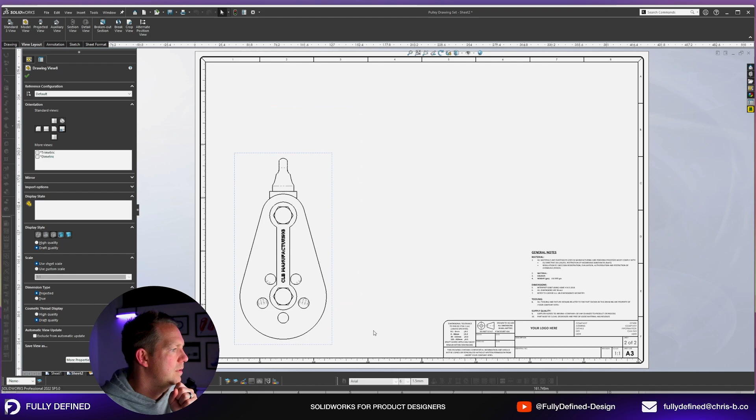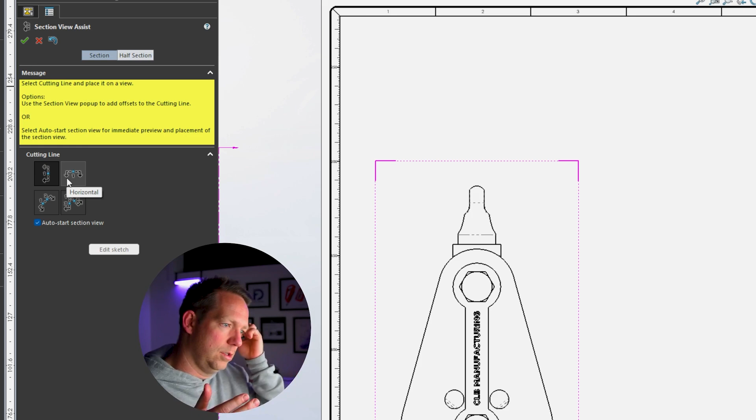So again, on our view layout, we can scroll across and click section view, and it gives you a description here. So we're going to select a cutting line and place it on the view. So you can see here the options on a cutting line. Normally, the 2 standard ones you use are like a vertical line or a horizontal line. And the arrows point in the direction that it's going to show you a section of. So your section might change depending on which direction the section faces.

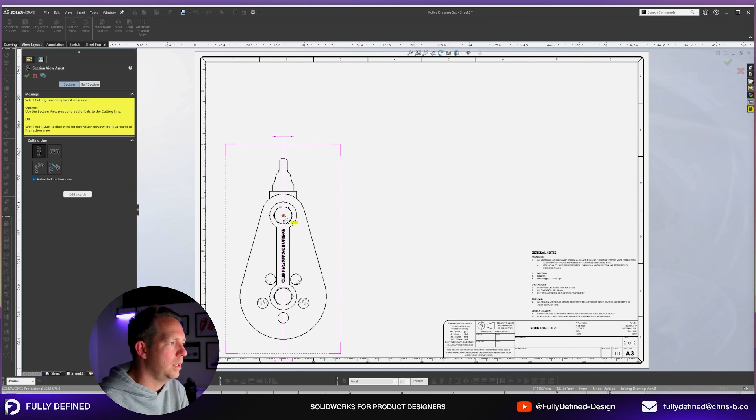Let's do a vertical one. And then what you want to do is find a nice midpoint to make that line coincident with. Now you'll find that as you hover over any of these circular points here, the center point of those circles will come up as a point that you can drop it on. I'm going to drop it here, and then the section view pop-up comes up. We're going to leave auto hatching on.

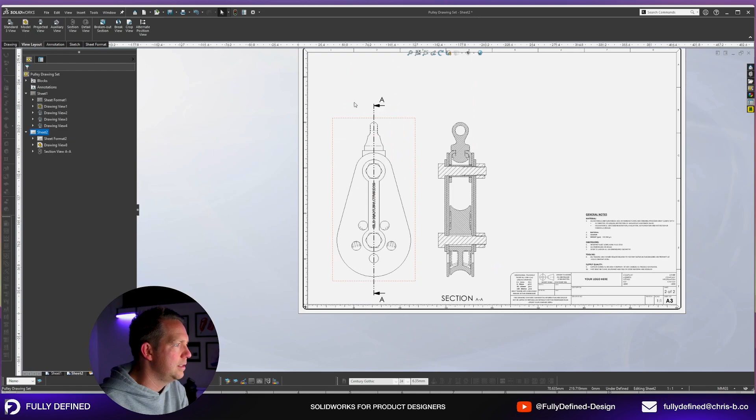Now flip direction is where you can see it's going to flip the arrows in the direction that it cuts. Leave that unchecked, press OK, and then we're going to drag. So I'm just dragging my cursor over to the right and click. Now the view label down here, section AA, is default, as is the letters on that section sketch. The hatching, if we click on this drawing view, that's controlled with the properties of the section view. We can change some of these elements.

So a partial section, not really useful in this example. Slice section, okay, so slice section, that's only going to show the parts that you actually cut through. So anything that is just behind that face, it's going to hide it. This is why we can't see, let's say, this hole through the bottom here, which is where this hole is, here. We can't see it when we're doing that slice section. But we'll leave that off.

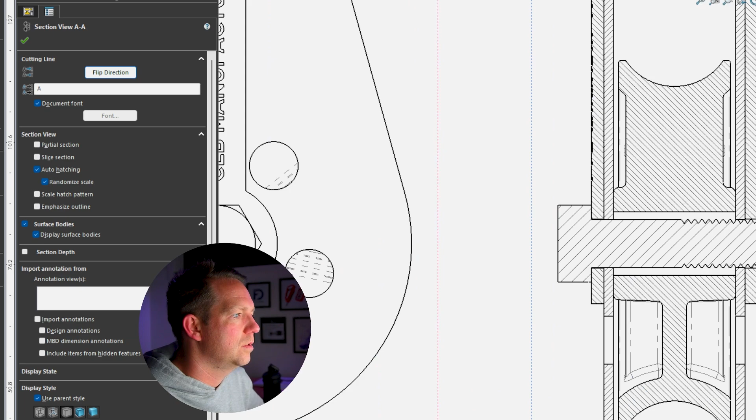Auto hatching we want on, but we might want to set randomized scale. And what that will do is change some of the proportions or angles of that hatching to work better with our drawing view. Scale hatch pattern, we'll leave. Emphasize outline can be useful. I'm going to tick that on. The rest of it I'm just going to leave and then press OK. All right, and we are done.

And we're going to save, and that's where we're going to cut the video for this first lesson. So we've chatted about document templates, sheet formats, how to download and import a sheet format, how to do some basic edits in a sheet format, and then we've looked at the very start of bringing in drawing views. So bringing in a standard 3 view, a model view, a projected view, and doing a section view here.

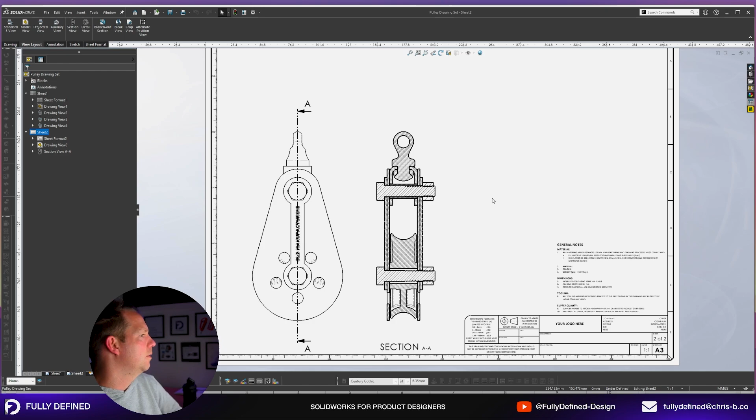Now, in our next class, we're going to continue to build out the rest of our views. So we'll do one of the sub-assembly, and then we'll start doing all the parts. Then we'll look at creating the bill of materials on that first page. And once we've done the bill of materials for that page and the sub-assembly, we'll work on exploded views, and then start to work through some configurations and other detailing before finally getting into all the dimensions.